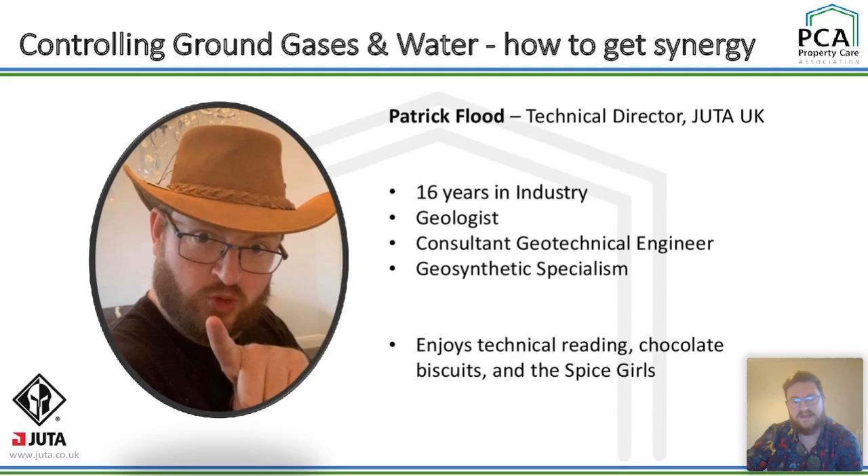And let's see if we can learn a little bit more about gas and waterproofing. I think there's a lot to cover. There is a hell of a lot. And what we're going to try and do is, I guess, scratch the surface in terms of some basic considerations. There's no way we're going to cover everything. Absolutely no way. I was saying to Andy and James yesterday, when they culled 30 slides out of this presentation because they didn't think we'd have enough time, which I agree with, there's perhaps going to be additional webinars required, focusing in on some of the more controversial or less understood aspects.

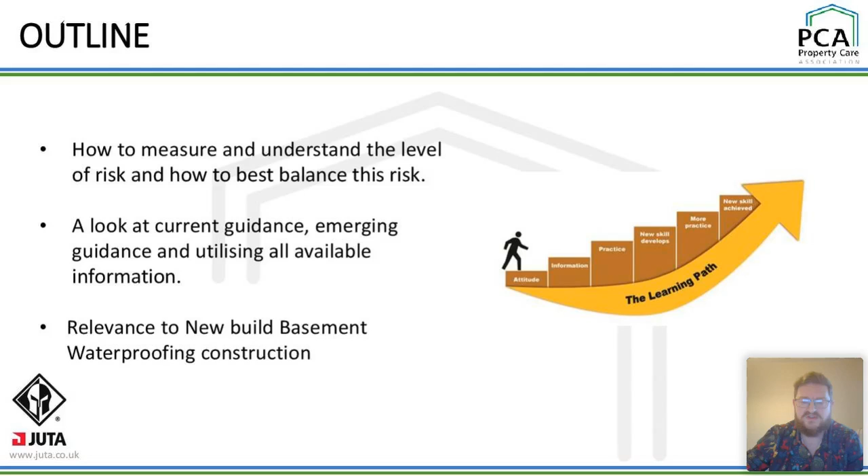But obviously the idea today is to look at how to measure, understand and balance the risk associated with structural waterproofing and ground gas protection. We're going to look at current guidance and some emerging guidance of relevance as well, primarily to new builds. So we're going to touch slightly on retrospective, but the bulk of this guidance and approach to particularly gas protection is focused around new build construction.

So hopefully today helps the listeners and the members of the PCA to be able to ask the right questions. What we're not trying to do here is to give you in a 45-minute session all the answers. The idea is to raise awareness of things we should be looking at and arm you with the right questions to ask, so how to get that information more than anything. We're going to focus primarily on the core principles of BS 8102 and BS 8485, which are probably the two most relevant guidance documents in this sector.

And there's a slight nod or tip of the old Akubra to the Basement Information Centre, TBIC, which is just about to publish, due in January 2021, a guide to basements and ground gas and structural waterproofing. We had a comments review meeting on Monday this week, so there was a lot of feedback from industry, for which we're very appreciative. There is still a little bit of work to do on that, but we're still confident of getting that out in January.

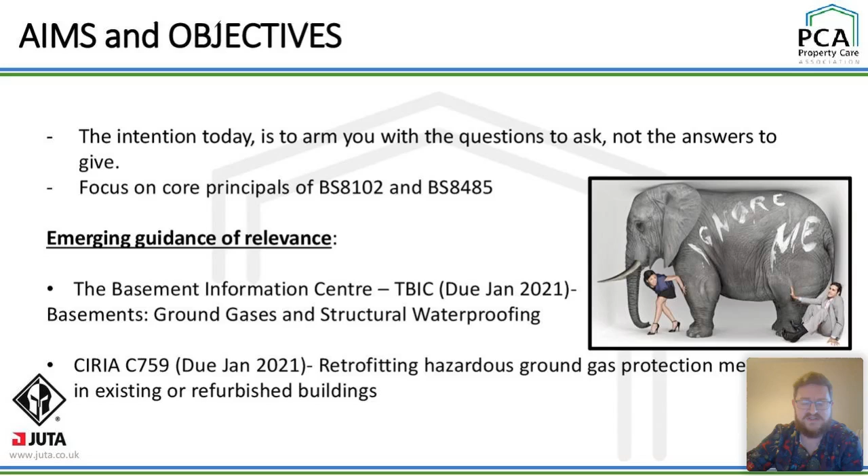And then CIRIA is about to publish as well, CIRIA C759, which is guidance around retrospective hazardous gas protection. So obviously there's quite a few members who I imagine would be interested in that. And CIRIA themselves, as well as probably the PCA close to the time, will likely run a series of presentations focused around the retrospective aspect. So we're just going to touch on the Hackitt report, and those of you who've been watching the news, obviously the Grenfell Tower disaster, which is currently front and centre of a lot of the news programmes.

But on the back of the Hackitt report, on the back of Grenfell, Hackitt commissioned this review of industry, looking at safety practices. And it started to resonate. So it's like a ripple in a pond. It goes further out and out and out, and eventually it encompassed the entire construction sector and the built environment. And what was identified during this process was that there's some bad cultural issues in the construction industry related to this race to the bottom.

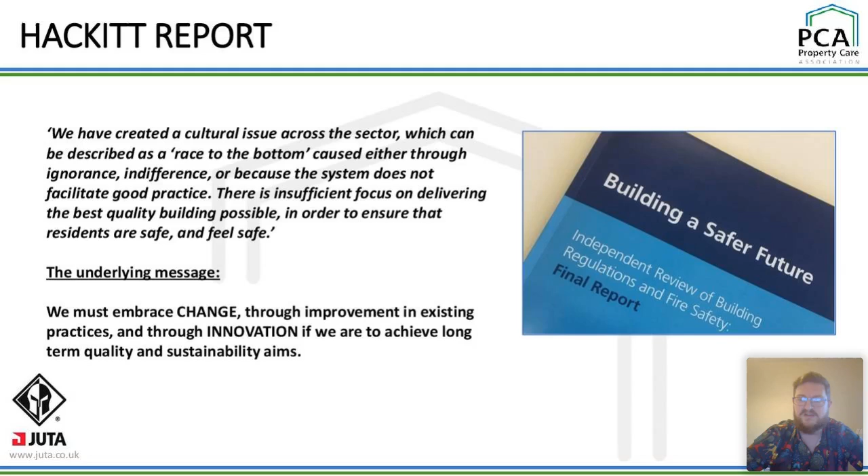So before we've even done anything on site, we're looking to save costs. And that doesn't really facilitate good practice. So what we need to do is focus on changing and embracing the change, both in terms of current practice and through innovation. So looking in more detail at products that are coming to market, looking to improve our sustainable approach and objectives if we are to achieve these long-term quality and sustainable aims.

And again, I feel a bit sorry for this chap at Celotex. If you've been watching the news, Celotex or Jonathan Roper, this chap has admitted to basically falsifying technical data sheets to fiddle test reports to make certain products look more suitable for application functions than they actually are. And I think, although the consequences of failure were obviously pretty significant in the cladding sector,

in the ground gas sector in particular, even with guidance changes in 2015 and 2019, we still see a lot of material supplied to market with good marketing information and statements of fact without any technical justifications or information to help engineers make an informed decision. And our job as manufacturers and suppliers is to give designers, engineers, architects, specifiers the relevant information to enable them to make the decision in terms of material suitability.

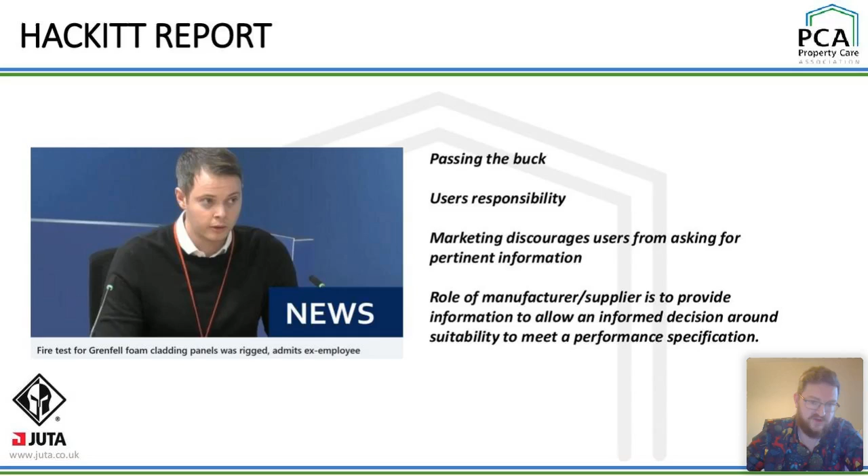So I think it's a fair point, and just helps us focus in on information, which is a theme that runs through today's session. So BS 8485 and BS 8102. The Code of Practice for designing protective measures for methane and carbon dioxide, gas protective measures for new buildings, and the Code of Practice for protection of below ground structures from water in the ground. I find it quite amusing.

Andy, if you stick the poll up now, I'll just carry on talking. So just a quick question for you all, just to see whether everyone's awake and alert at 9:07 in the morning. Which of these two documents do you feel takes precedent in this particular scenario? If we're looking at waterproofing and gas proofing, BS 8102 or 8485, which takes precedent?

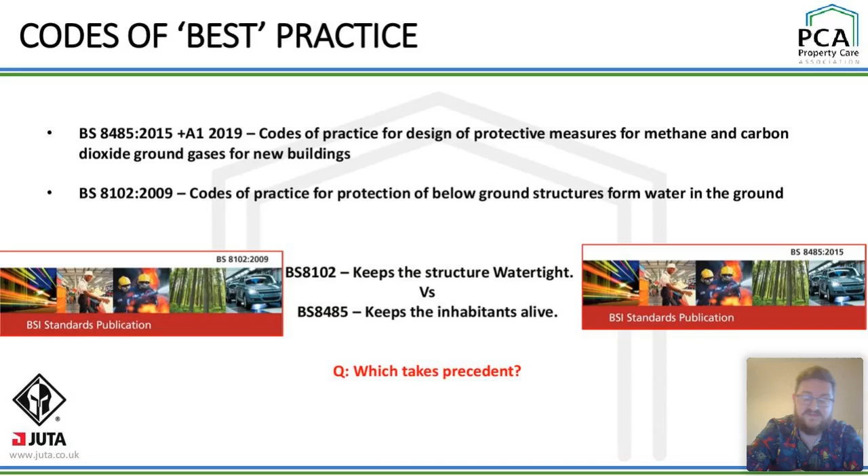And then most recently, which was only a couple of months ago, we have a housing development in Bradford which has been valued at zero because of failure to get appropriate sign-off on gas protective measures. And I know there are industry experts involved in a few of those cases still, doing back analysis, so looking retrospectively at gas protection. But both documents should be considered equal.

So if we look at our appetite for risk, there's a common misconception that basement construction is high risk. Of course, there are additional challenges with constructing below ground, but not all basement construction is high risk. So there will be some instances where we can construct below ground level with relatively low risk, both in terms of waterproofing protection and with regards to gas proofing.

But what we have in our industry is everything is last minute. The amount of phone calls I get, I've got three waiting for me when I come off this presentation, where we've got people on site and they're supposed to be installing gas membranes and they've got lift pits and they don't know what they're doing. It's like, well, how have you got to the point where spades are in the ground, concrete is being cast, and we haven't considered the forms of defence for the structure? It's bizarre, but it does happen, and it happens more often these days.

I don't know why. We often talk about in our office the last three to four years in particular. Everything is last minute. Everything is rushed. The amount of planning is out the window at the minute. Forecasting when people need materials, it's just very, very difficult to get a handle on programs of works at the minute, which is something I think we need to look at as an industry and look to change in general.

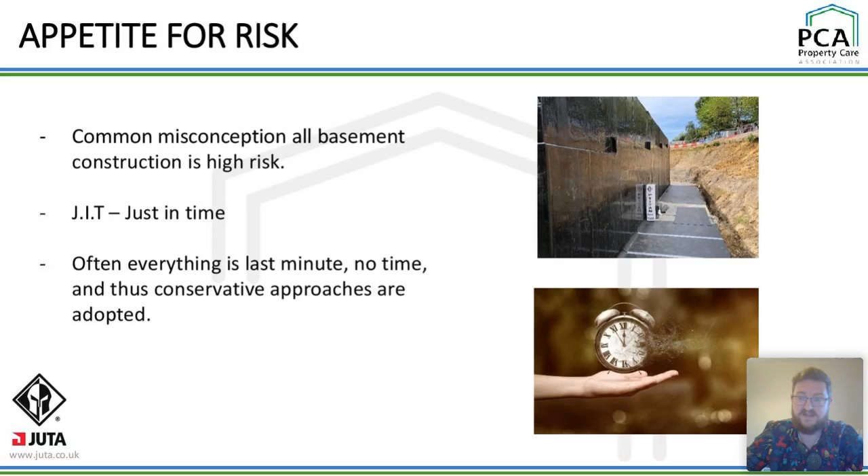So better planning will save ourselves a lot of pain and a lot of money by being better prepared. So that is what drives risk up a lot of the time as well. That rush. We end up having to compromise, and compromise is usually introducing additional risks. But to reduce risk, first we have to understand it.

And I know if any of my colleagues are watching this, they're going to be hanging their heads, because I'm constantly talking about this Dunning-Kruger effect in terms of the bathtub of knowledge. So when we do a little bit of training, everyone leaves the sessions feeling full of confidence, and they go out into the world preaching the message as though they know everything.

And then over time, you realise perhaps what I learned in that 45-minute session wasn't everything, and we develop an understanding over time. And then only with lots of knowledge and experience, both practical and theoretical, do we get a good understanding of industry, but we also learn to appreciate our limitations, which is part of that experience and knowledge curve. So we know what we're good at and we know what we're not good at.

And again, one thing I find hilarious about our industry, both in terms of manufacturing and environmental protection across multiple sectors, is we don't talk about our limitations. It's one of the things we don't do. I got embroiled in a LinkedIn back-and-forth a couple of months back, if anyone's that bothered about social media, where we were actively discussing limitations of products, and I think a lot of other manufacturers around the world were horrified that I'd gone on there and talked about what our products didn't do.

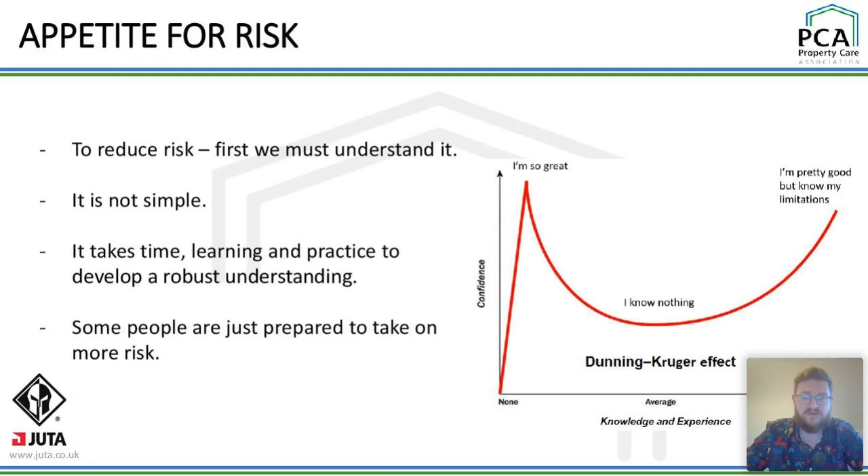We lost a little bit of transition feature actually when we uploaded the presentation to WebinarJam, which I'm upset about, but this particular slide, I mean, I see it all the time, again, with our guys, with others in the industry. We'll get a drawing in.

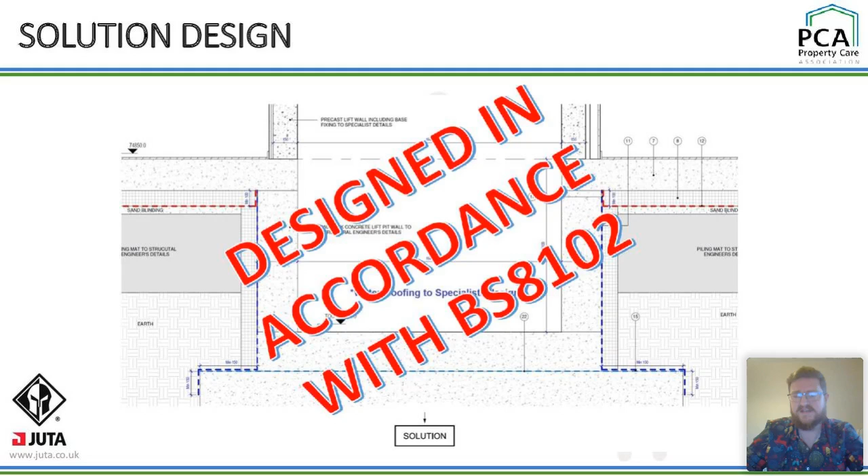There'll be some lines on the drawing which indicate damp proofing, waterproofing, perhaps a note saying waterproof concrete, but there's usually a big stamp somewhere on the detail which says waterproofing to specialist details. So line on a drawing by architect engineer, waterproofing to specialist details, and we instantly jump to solution provision, which is saying use X product here, X product there, this particular additive, and that is in accordance with BS 8102, provides a grade 3 environment. So that is designing without understanding the appropriate risks.

We see the same in BS 8485 with the point score system. We'll see details come into our office which say we have a CS2 residential housing development type A, 3.5 points required, and we go ventilated subfloor void, 150 mil minimum, 2.5 points, gas protective membrane, 2 points, 4.5 points, CS2 type A, tick, move on. That is not design. So adding up point score for particular elements is not design. You are basically ignoring the risk assessment.

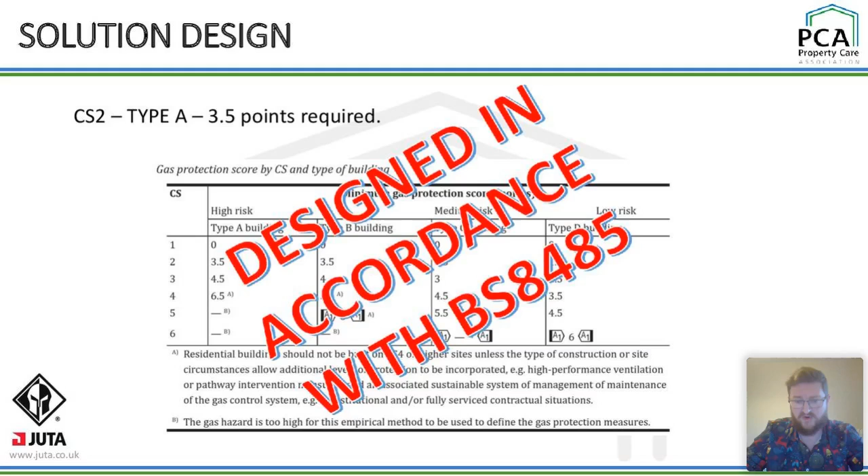So again, what we're going to do is focus on what we would expect to see to be able to justify those solutions that we propose from a supplier, manufacturer, contracting point of view, as well as from the regulatory perspective, so building control, architects, engineers, in terms of what information is required to provide that performance specification. Again, I'm going to try my best to cover it all, yeah?

So we look at design flowcharts. On the left-hand side, there is the design flowchart from BS 8102. On the right-hand side is the design flowchart from BS 8485. And in the middle is the combined flowchart from the TBIC document. And again, you're not supposed to be able to see that slide. They were designed to transition in individually, but the process of forming the design team, site investigation, desk study, risk assessment is consistent through all three approaches. So we should be doing that anyway.

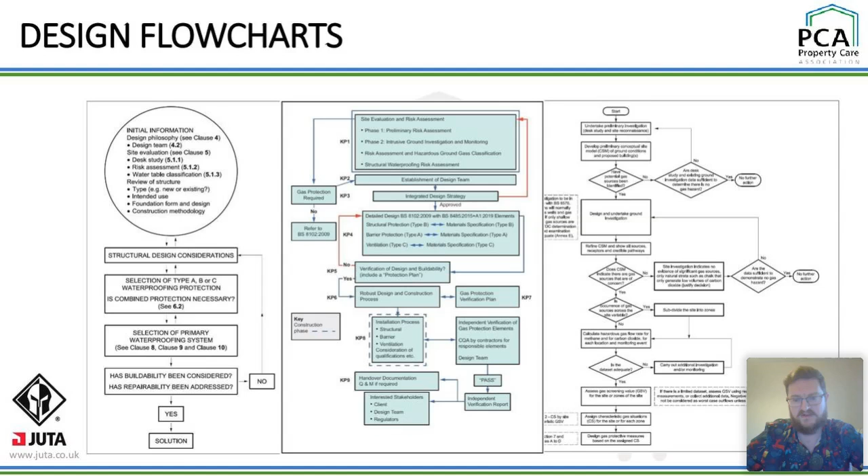So we're going to remind ourselves of this process, which I think is important because we have definitely, in general, I know my mate, well, there's a few mates, in fact, I shouldn't mention them individually, and I've not checked the chat, but I can probably bet my house that there's 2 or 3 people who are already chirping saying we do that. Like, don't worry, we sort that out.

BS 8102. So dealing with that combined gas and waterproofing system, I would argue it's already in there. So the design philosophy, section 4.1, details that appropriate structural waterproofing design should account for things like contamination, radon protection, methane, carbon dioxide, and other contaminants in the ground. The risk assessment process is already detailed out. Then we have an options appraisal phase already in BS 8102 before we get to the solution phase.

So the process of investigate the site, look at the risk, appraise the options, provide a solution is consistent throughout all this document. So that is the journey we are now about to embark on.

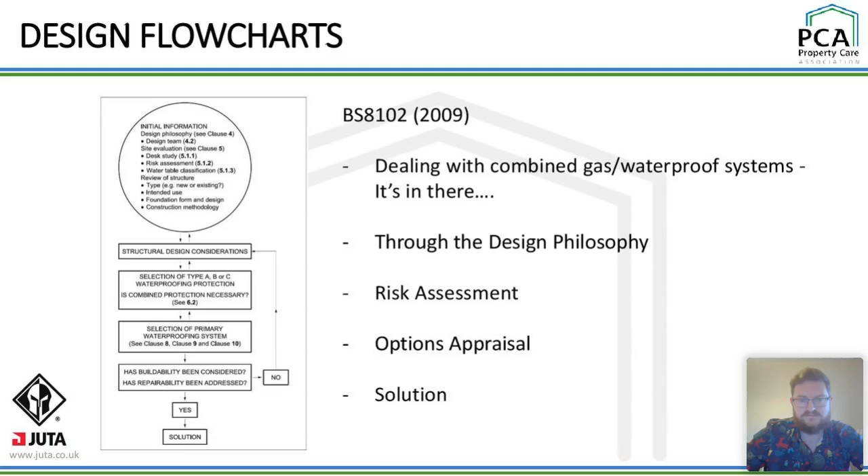So good risk assessment helps distinguish the high-risk sites from the low-risk sites. It's very difficult to say a site is low risk unless you've completed an element of site investigation, desk study, or risk assessment. So external factors may need control, things we can't do immediately in the vicinity of the structure. We may have to do some off-site measures to reduce the risk, and some developments may be completely unviable.

Although we ended up winning an award for it, there was the Harper Road project at Coventry recently, which needed an off-site dewatering, contamination curtain wall to make the student flats viable. So that off-site process was an integral part of enabling that development to occur.

There's another poll here, if Andy can start to prepare himself. I've chucked this in here because, again, it came up in discussion the other day. If we're looking at this sort of risk assessment design process, who would normally complete that, do we think? So in our opinion, who is assessing this risk? Is it a waterproofing specialist or would it be a waterproofing designer?

Well, folks, the poll's now up for everyone. Again, similar process. Just leave it up for a couple of secs. Again, don't let it run for too long. Just once the bulk of opinion starts to come through, just shout that out, Andy. But we debated this point the other day on Skype with some of my esteemed colleagues in the industry for 1 hour and 20 minutes. So let's take 10 seconds to see what the room quickly thinks.

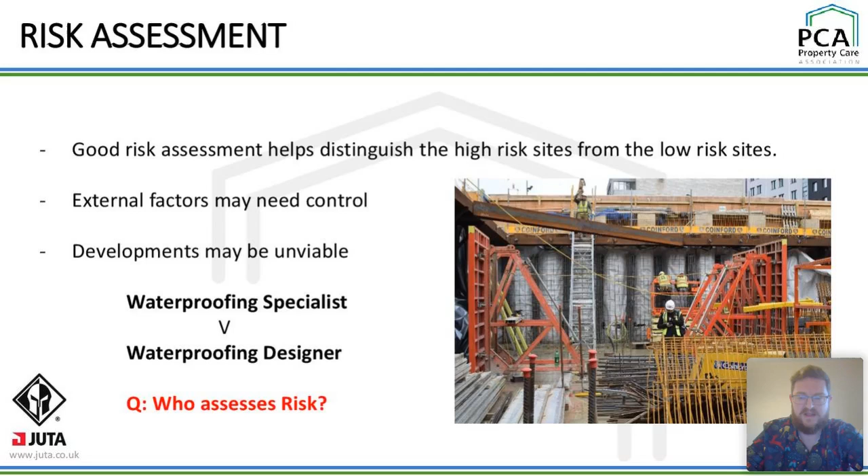So the risk assessment process, I've stolen this from Neil Salvage, who stole it from Ground Gas Solutions, GGS. The pie chart of investigation, risk assessment, design, installation, the gap at the end is the check. So check, verification, did it work? But approximately 60% of the pie is upfront work, so investigate, risk assess, design. So a big chunk of the inception through to development and construction is planning. Now, we talked about JIT, just in time. If we reduce that 60% to 2%, 1%, then of course we're asking for trouble.

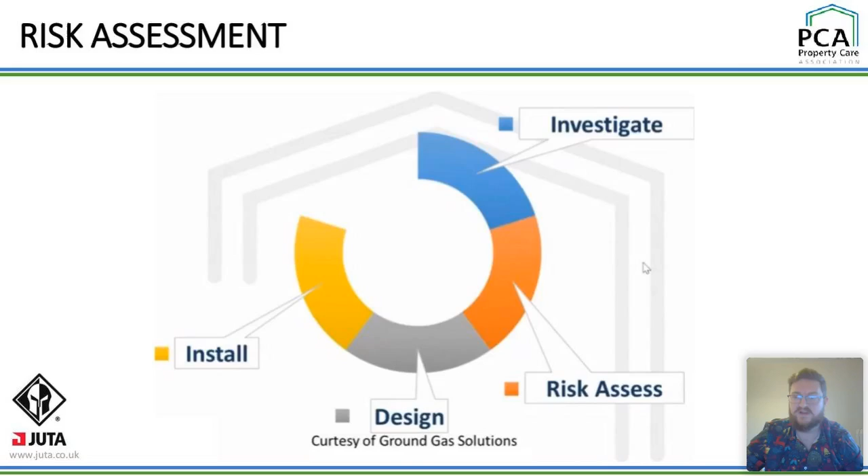So again, another poll, and then I'm going to leave you alone for a little bit. Has anyone ever completed or reviewed a conceptual site model? Often abbreviated to the acronym CSM, conceptual site model, or a ground model, which is the BS 5930 terminology. So have you run that poll, Andy?

And I think what I'm trying to instigate with our own team is getting in the habit of just whipping out a piece of paper and sketching up the site and where potential risk factors may be coming from in terms of developing those basic ground models. It helps us understand it. But how many people have reviewed or completed, Andy?

Well, there still seems to be one clear winner, the answer being no bloody chance, lad. No bloody chance, lad. I accept that, because conceptual site model is something we become very familiar with as a geologist. Obviously, I was sort of weaned off university on ground models, so it's second nature for me. But it's not for everyone else.

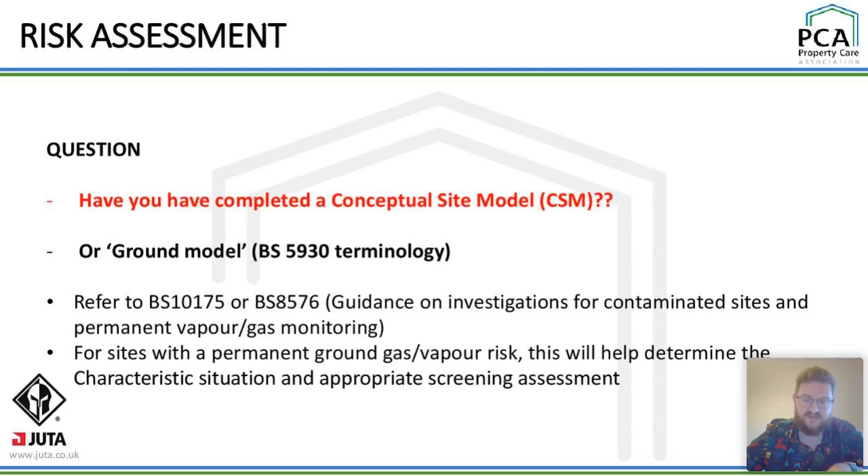But a visual representation of the site and the risks: what is the source of potential contamination or the hazards, so water, gas, contamination? How is it getting to the structure, so pathway? And then the receptor is obviously humans, animals, vegetation. So that source, pathway, receptor model, we can visually represent with a conceptual site model.

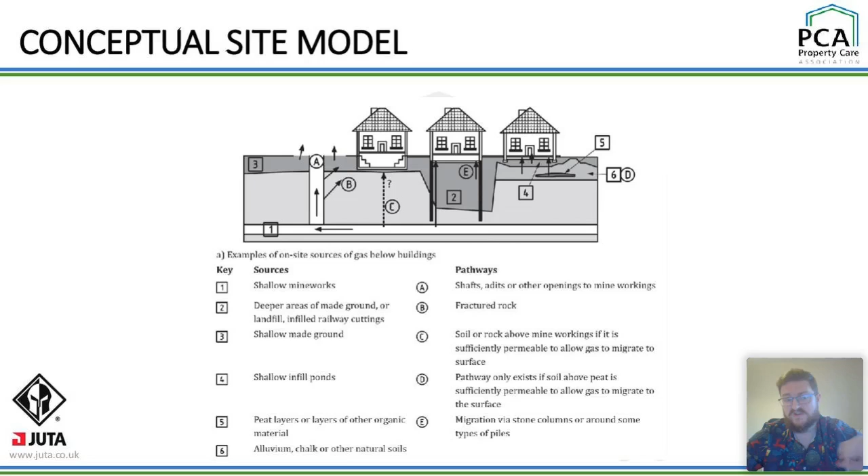So here's an example of a conceptual site model straight out of BS 8485. So if we look at houses with semi-basements or full basements, we're looking at where potential contamination or hazard is coming from, and how it is getting to the development. And once we begin to understand that, we can then look at ways of eliminating or reducing the risk. So building up that visual representation is an important step in the process.

And I stole this from EPG. Actually, I got permission to do so, but EPG represents it very well when it comes to assessing structures below ground. The type of risk assessment is dependent a lot on the groundwater table. So whether we have a high water table, so water directly in contact with the basement, the type of assessment is different. That would primarily be a dissolved phase assessment. So the water has the gas in solution, and if the water is entering the structure, it's taking the gas into the structure.

On the right-hand side, where you have a capillary zone or an unsaturated zone below the structure with a low water table, or a water table which is variable, which has a pumping effect on ground gas, then the risk driver is gas. So gas will be forcing its way or looking to enter the structure in gaseous phase. So the two ways of assessing the risk are different depending on the groundwater table. So for very deep basement structures, which would be anticipated to be completely submerged most of the time, a gas phase risk assessment is not the most appropriate way of assessing the gas risk on that structure.

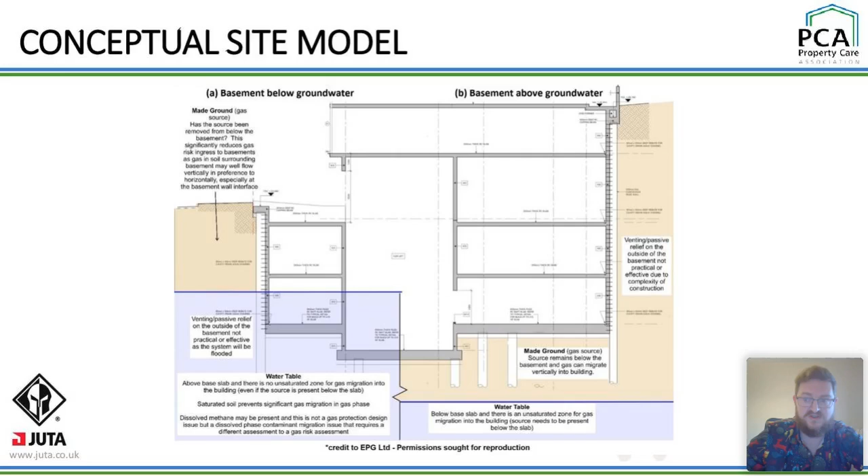It's a more detailed dissolved phase assessment. Okay. Now, again, that in itself is probably a 3-day training course. So we'll very briefly touch on it, but it's the different ways to look at the risks and justify solutions ultimately. Yeah. So a desk study, so a good desk study is about technical due diligence.

So we start at like a high level, so a helicopter view. So we're up in our choppers and we're looking at the site. And we're saying, what can we see around the site? Like, what's that over there? That looks like an old landfill site, or there's what looks like an abandoned factory over there. So there's a potential for some off-site source contamination over there.

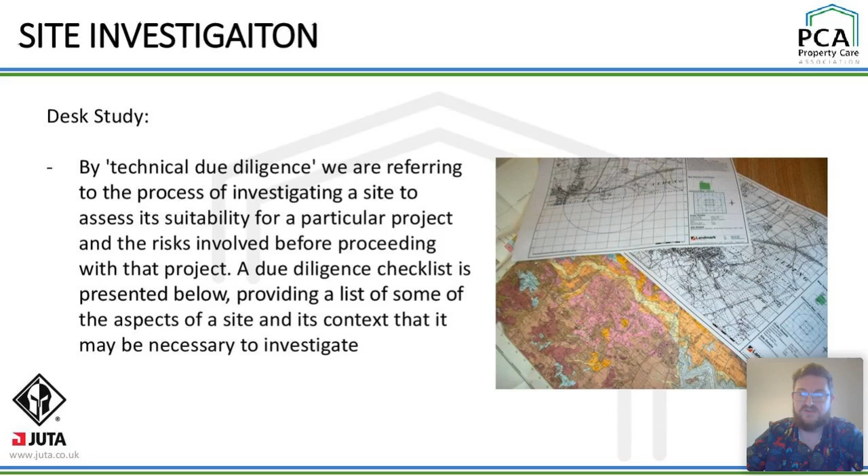So we complete that high-level check first, and that will then determine whether we feel there is justification for doing any more investigative work, or whether we feel the desk study has provided enough information for us to justify the site is reasonably low risk and proceed as such. So the desk study may kick out the fact that we need a ground investigation. So we may need to dig some boreholes or trial pits, or what's called a phase 2 or a phase 2A, which is perhaps some bespoke gas monitoring or vapor assessments.

And then usually on the back of an investigative report, there's a level of interpretation that occurs, so what's called a phase 3, where we investigate and we report, and then we interpret that. What does it mean? So what are the consequences of that? Additional remediation may be required to reduce the level of contamination to an acceptable measure, i.e. the incorporation of gas protective measures or the removal of on-site contamination by excavation. So we need to dig that source of contamination out, move it off-site, before we can proceed with the development.

If we leave it in the ground, then we're going to have some very expensive and costly protective measures to implement. And then phase 4, which is validation or verification as we commonly know it. That's part of a phase 4.

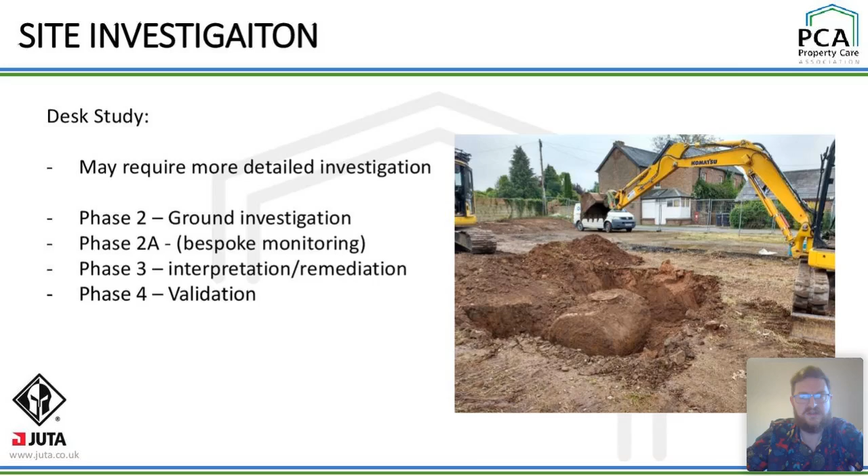Recognized gas screening approaches. I'm going to just start to speed up a little bit. I'm nearly half past. So we have low risk sites which can work on total organic carbon content, TOC assessment, so made ground assessment, what we call semi-quantitative approach or empirical, which is the gas screening values or the CS scores and the matrix from BS 8485, and then what's referred to as DQRA, so detailed quantitative risk assessment.

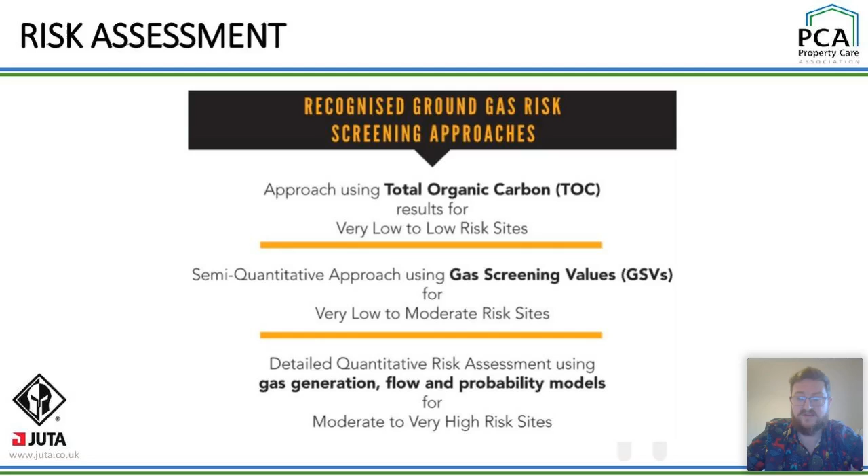Now, a DQRA is usually required when the risks are either too high to model empirically, so when it comes to basement structure, it may be the points score model doesn't fit, given the risk. So we need to do a more detailed assessment, or we can use it to lower the risk or characterize the site in more detail. So we investigate the potential over time of the source. So any source of contaminant has to have the potential to remain over time to present a threat or a risk to human health. Yeah. So a DQRA will look at that in more detail.

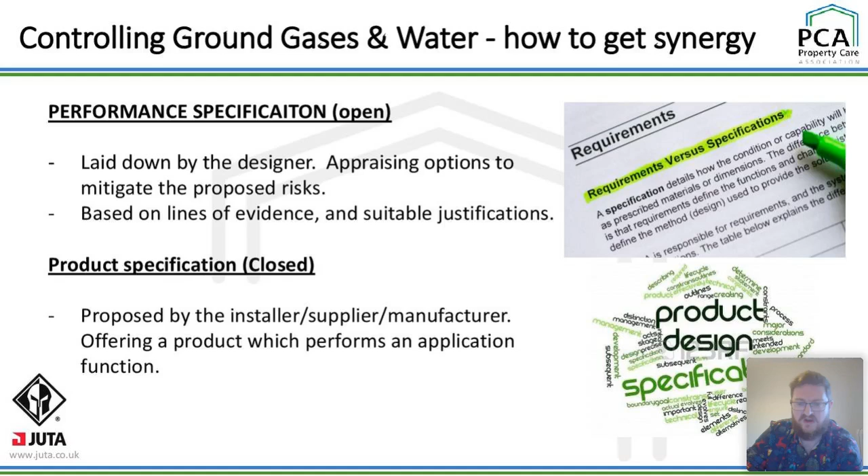So then performance specifications, which are generally referred to as open. Open specifications, usually laid down by the designer, appraising options to mitigate proposed risks based on lines of evidence with suitable justifications. Or we have product specifications, which are also called closed specifications, where the designer may specify particular products through justification, or it's a proposal by installer, contractor, manufacturer offering products which perform application functions.

So when we look at gas protection above ground, we have three elements to work with. So the structure itself, which can be various forms and has a sliding scale of points, but that sliding scale represents the relative impermeability to gas of the structure. So the more compact, dense, reinforced concrete will have a higher gas protection score versus open block and beam flooring, which is relatively leaky and therefore has no protective score. Gas membrane, so a 0 or 2 point score.

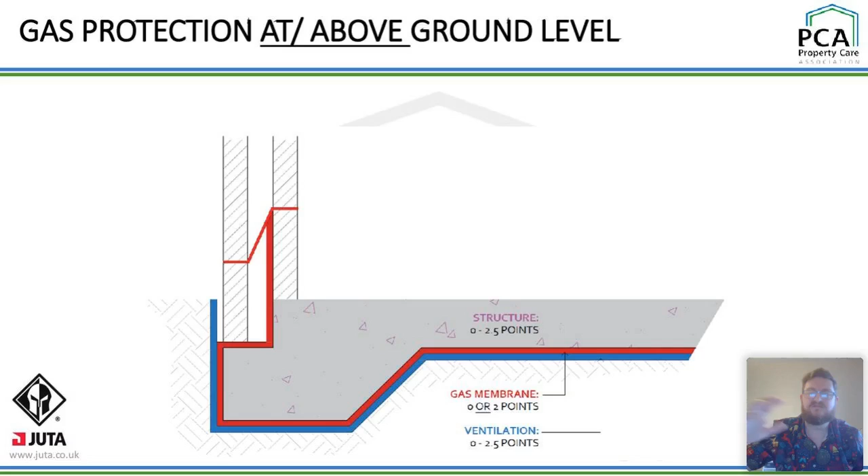External ventilation, again a sliding score based on the amount of air and the ability of the open void below the structure to dilute hazardous ground gas to an acceptable concentration. When it comes to basement construction, we generally discount external ventilation in respect of BS 8485 because we can't guarantee that the external ventilation is going to remain functionally intact, i.e. the void remains open below the structure for the anticipated design service life, which is probably going to be at least 60 years, because the below ground structure, or that void below the below ground structure, can flood.

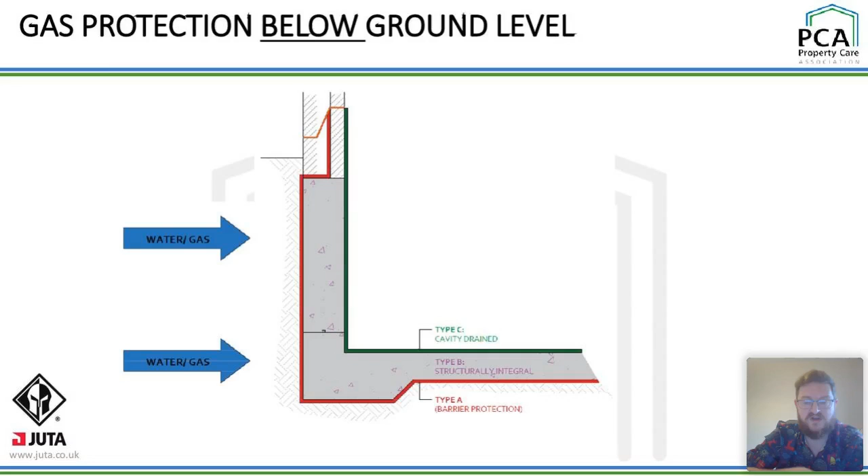Yeah, and if it fills with water, then it's not allowing air to move through it. So we can't rely on those systems for below ground waterproofing and gas protection. So when it comes to BS 8102 and below ground structures, we're left with the type A protection, so externally or potentially internally applied in cases, barrier, the structure itself again, which is very, very important, and then an internal cavity drainage membrane.

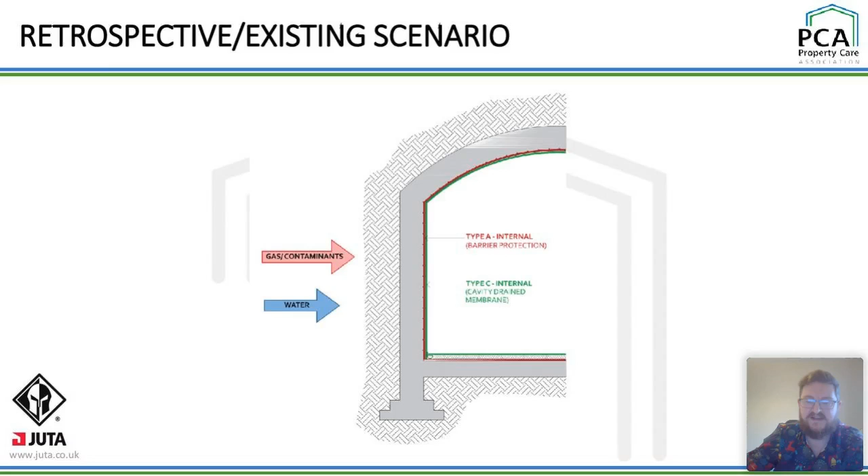So we're looking at risk coming from the outside of the structure, working its way in towards the receptor. Just very quickly touching on retrospective basements, we don't have the ability to look at the outside, so we're often forced to deal with the inside. So again, this new CIRIA document that's coming out will deal with this in much more detail, but your option appraisal is significantly reduced when you're looking at existing structures because you can't access all areas of construction.

As we touched on before, you may have come across this in risk assessment, so ERIC, or ERIC PD it actually is. The PD is protective equipment and discipline. But if we focus on the core principle: eliminate, reduce, isolate, control. So the first thing we look to do with any sort of risk assessment is to eliminate and reduce the risk before we have to isolate and control it in contact with the receptor.

So another poll for Andy to throw up. Just a question. I'll be surprised if anyone gets this one wrong, although there is no wrong answer, or is there? Where is the best place in new build construction to address risk?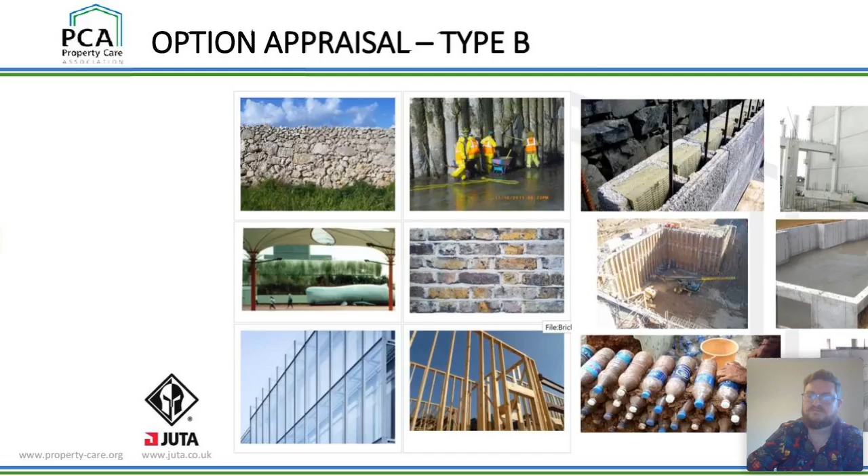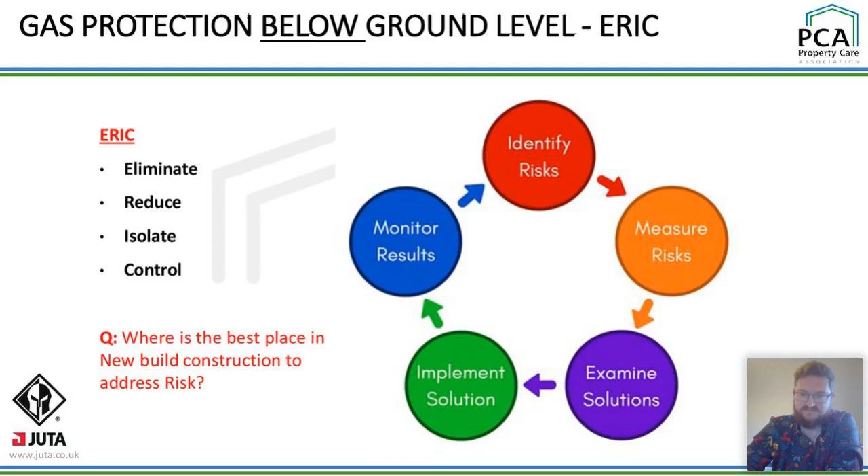Yeah. Well, folks, that poll is now up for everyone. It should again just pop up on your screen. I'm just waiting for results just coming through at the moment. Patrick, I can tell you there's one clear winner at the moment. Inside? Well, wait, what? There's one clear winner at the moment, but people are still pressing the button, so I'm not going to announce that answer just yet. So we'll give it another 3 or 4 seconds, guys, because we need to kind of move on. So 3, 2, 1. We're moving. There we go.

Right, okay, clear winner being number one, outside, before it comes into the structure. Outside, yeah. So, I mean, I think it's an obvious one. We should be looking to keep the risk out of the structure as best we can. And only if it's impossible to do that should we start to implement isolation and control measures in close proximity to the receptor. So we're going to move through onto options appraisals now.

So we look at the structure first. Probably the most important aspect of any construction is what it's going to be built out of. This is doing all the structural work. It's keeping the building up. It's keeping it intact, integral. So the structural aspect is the primary form of defence.

Andy's messaging me, speed up.

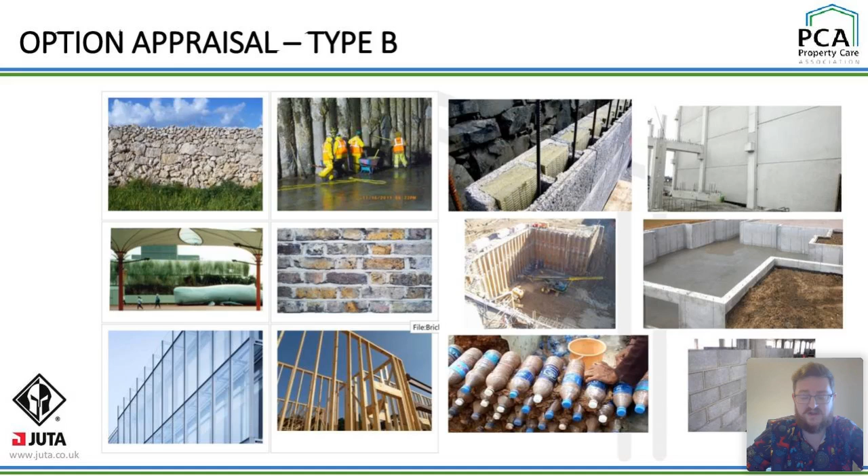So you can build a structure out of anything. I put the plastic bottles one on there because I think it's amazing some of the things they do in developing countries, where we're looking at different methods of construction to keep people safe and dry. But it's just completely inappropriate for below ground structures.

When we look at BS 8485, I know there's a lot of people upset about this or can't quite understand it, and I am one of them: why they decided to differentiate the point score between grade 2 and grade 3 waterproofing. I don't know many structural engineers that design the concrete to leak, which is essentially what designing to grade 2 would be. We're usually looking at making the structure as watertight as possible.

And therefore I think we should all accept a good, well QA'd, so quality assured, compacted concrete pour with controlled crack width is deemed sufficiently impervious to water and gas. So a well compacted concrete structure has a very, very low risk score when it comes to gas and water permeation, and therefore it has a high point score in terms of its point scoring index, so 2.5 points.

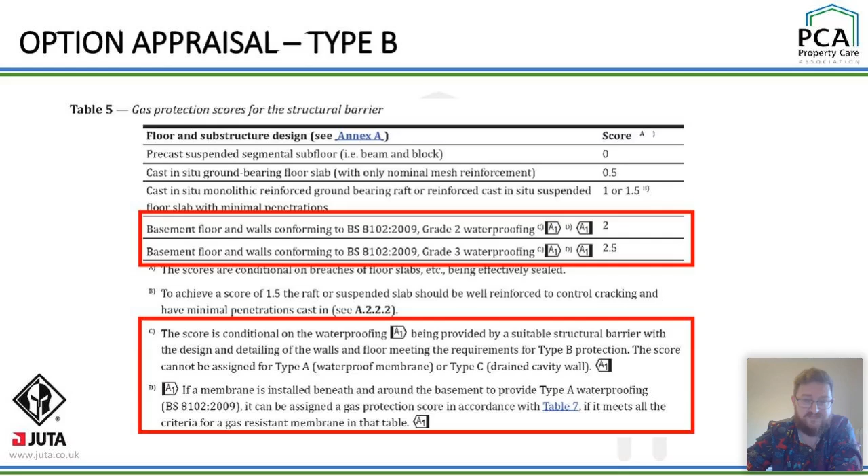What was clarified in 2019, because of the grading environment, which causes confusion as well sometimes, was that score is for the structure on its own. It's not dependent on the actual grade environment. So what we're actually looking to do is to remove that ambiguity. I don't think many people would be looking to use 2 points.

Because 8485 further goes on, when we look at Appendix A6, A2, it actually classifies concrete to grade 2 or 3 to BS 8102, which is essentially BS EN 1992 Part 3, as low risk. Yeah.

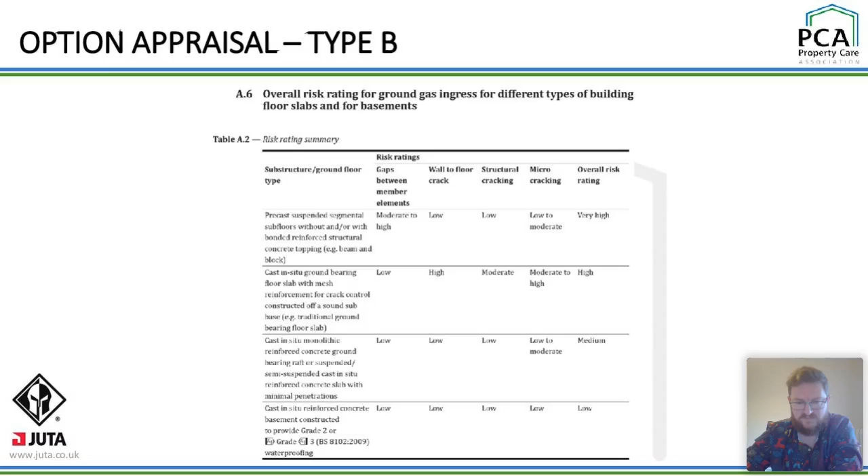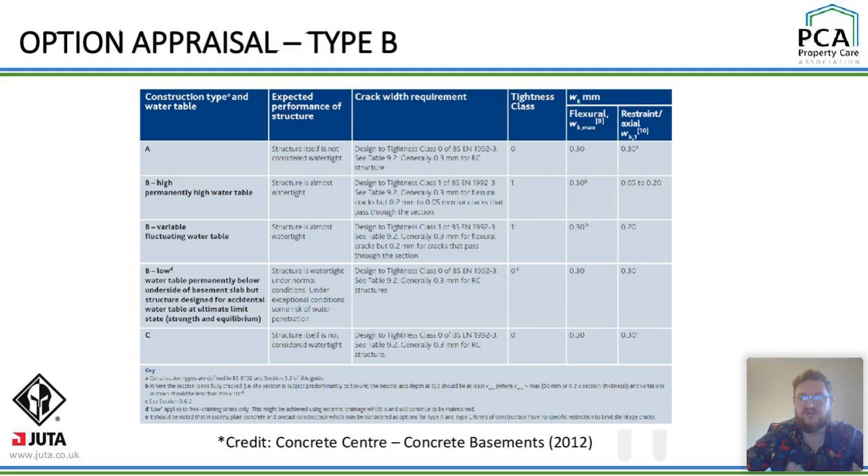And then I stole this from the Concrete Centre as well. So we look at tightness class of concrete structures with regards to the water table. So if we start to look towards tightness classifications rather than grading environments with regards to gas protection, this may assist the process of understanding that well compacted, QA'd concrete is a good form of defence for water and gas

protection. NHBC guidance goes as far as to stipulate crack widths. So what NHBC would deem as watertight: concrete with admixtures is 0.2 for cracks all the way through and 0.3 for flexural, and without admixtures 0.2 for both full and flexural cracks.

The inclusion of an additive, an admixture, or a superplasticizer or crack inducer in injection, I don't want to exclude any potential solution here. That's not what it's about, because everything is on the table for consideration as long as appropriate justifications are in place. So if I've missed a particular technology you provide and you're in the chat and you're currently melting your keyboard, I apologise. I can amend the presentation retrospectively to include it if you feel appropriate.

But the inclusion of these performance enhancing products, let's use that, reduce pore space, seal cracks, promote healing and reduce capillary action of the concrete, which reduces the risk even further. So if we can improve the water tightness of the concrete, it will improve its resistance to gas transmission. So that is a risk reducer, the inclusion of a performance enhancing additive.

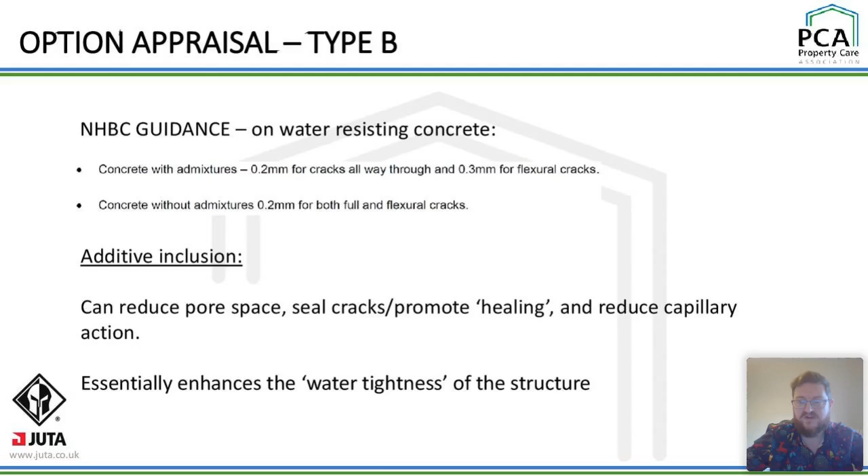But there is this argument that all concrete is porous. So notwithstanding it does crack, gas, and particularly radon, will permeate through the pores and also by diffusion across the pores. So radon in particular, being a radioactive element, through decay from radium's alpha particle down to radon, can move across that concrete structure fairly readily.

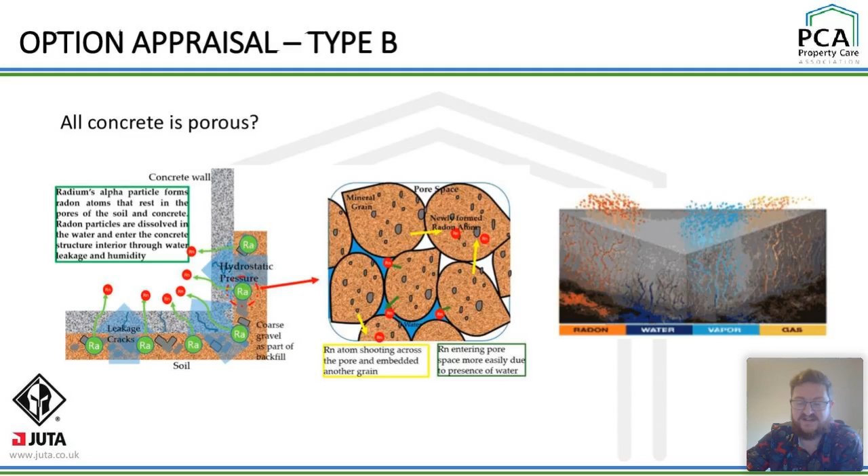So if we're dealing with radon affected sites, and I know again I'm deliberately trying not to touch on that because it is a subject in its own right, you should incorporate some sort of protection or ventilation system internally to control that. Type B systems, there are a whole raft of protective measures out there.

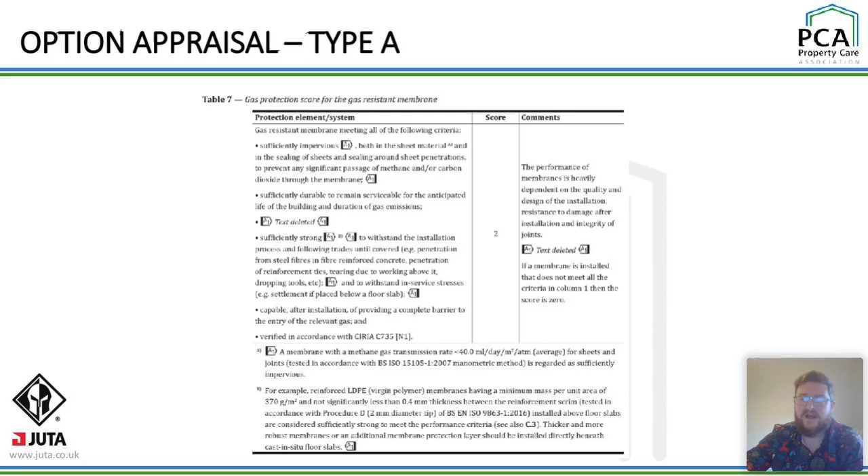8485 goes as far as this table 7, which again is the bane of most people's lives because everyone just focuses immediately on the benchmark performance value of less than 40 millilitres per metre squared per day per atmosphere, but there are other things to consider in there. Probably the most relevant part is the independent verification to C735.

8485 also confirms that there are many different types of gas membrane and membrane choices. So each type of membrane should be considered on its individual merits and conformance of properties. So the ability for it to resist puncture, elongate through anticipated structural movement, the gas transmission rate, its resistance to water pressure at various application depths are all things we should consider.

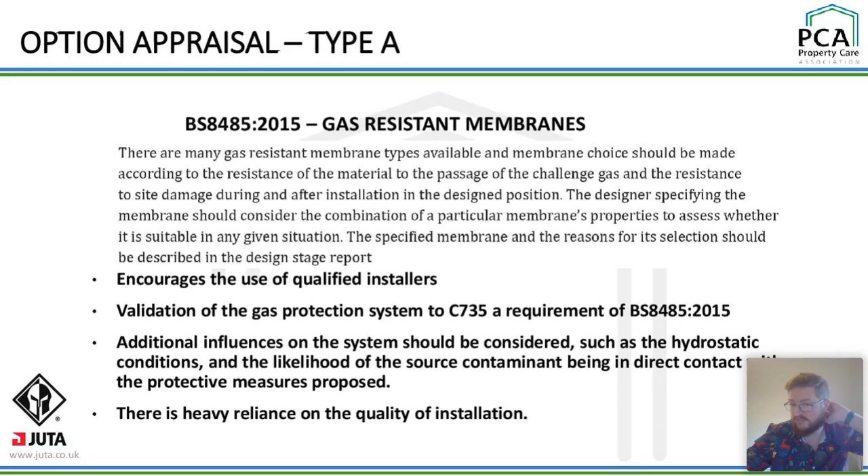And one of the things we do like about 8485 is it encourages the use of qualified installers, because as we know, no matter how good these systems are, if they're installed like a bag of spanners, they won't work. The same is true of concrete, type A membranes. If we just let unqualified, unskilled labour install these systems, we're asking for trouble in the future. So there's a focus on do it properly, have it independently checked, and that is the best way of reducing scope for defects or potential defects to occur at some point in the future.

Type A options in BS 8102 vary from loose laid bonded sheet membranes, liquid applied systems, GCLs, incorporating coated products as well, mastic asphalt, cementitious crystalline slurries and multi-coat renders. And what you tend to find is the GTR increases as the pore space is open. So your barrier systems or membrane systems generally have a lower gas transmission rate, and your cementitious type systems have a higher gas transmission rate.

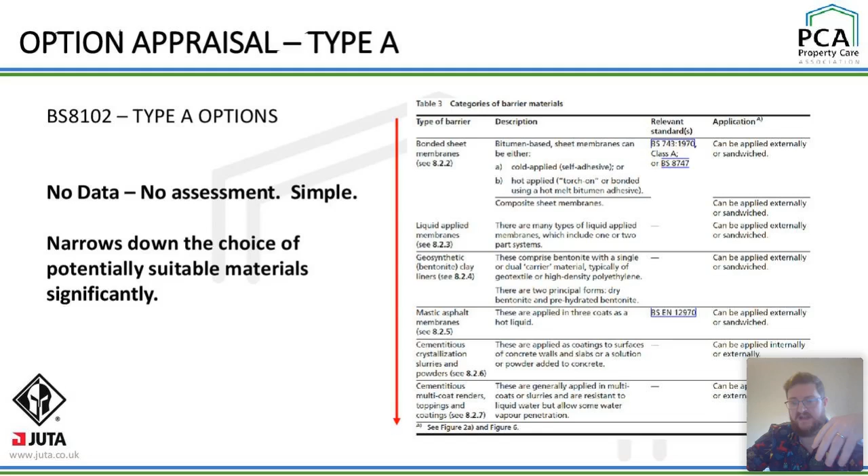Each of these systems can be justified as appropriate in any given risk scenario by the designer. It's not a pass or fail criteria. Everything has to be justified. It's easier to justify the inclusion of a material which has a low gas transmission rate than high, but everything should be considered.

C748, again, hydrocarbons and VOCs, you're dealing with fairly bespoke vapor intrusion assessment. So the information is important. So if you're going to consider these materials for use as VOC and hydrocarbon membranes, you would expect to see a set of information which is outlined in C748, and that is permeation rates for a suite of BTEX, TCE, so tetrachloroethane, trichloroethane, hexane, vinyl chloride. It's like what we call the challenge 9.

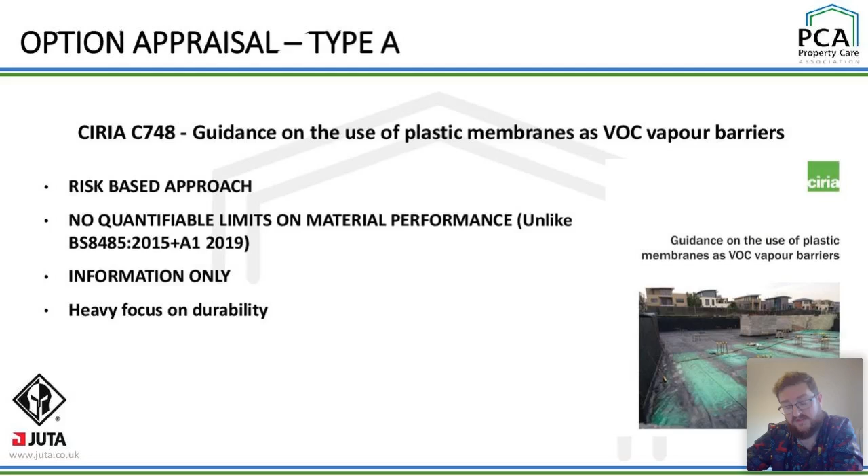So as well as durability information, because hydrocarbons in particular are fairly aggressive on structures and on thermoplastic materials or derivatives of. So it's additional assessment required for VOCs and hydrocarbons. Aluminium foils below ground, I'm just going to quickly touch on this. We're seeing quite a lot of this at the minute because we have above ground gas membranes, which are enhanced DPMs, so damp-proof membranes, usually incorporating a layer of aluminium, which has a very low transmission rate for gas.

And we think if we stick a gas-resistant damp-proof membrane onto the back of a typical waterproofing product, then we've got a waterproofing membrane and we have a gas-proofing damp-proof membrane. We stick the two together, but that's a recipe for disaster. So the aluminium will degrade over time. Aluminium is not designed to be installed in hydrostatic application conditions. It corrodes. On the negative side, it removes the bonding element, and on the positive side, it prevents the hydration of this active system. And I've just got enough time to squeeze it in.

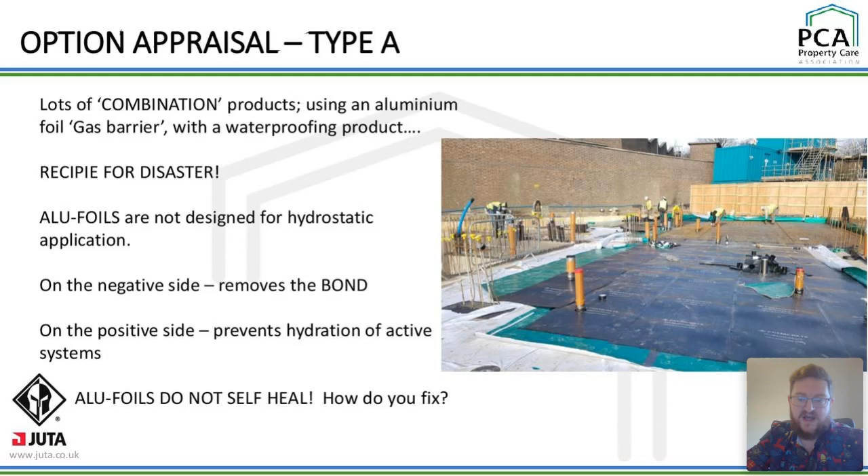So Terminator 2 technology doesn't exist. Aluminium doesn't self-heal, contrary to what some marketing literature would have you believe. So massive red flag for me, that.

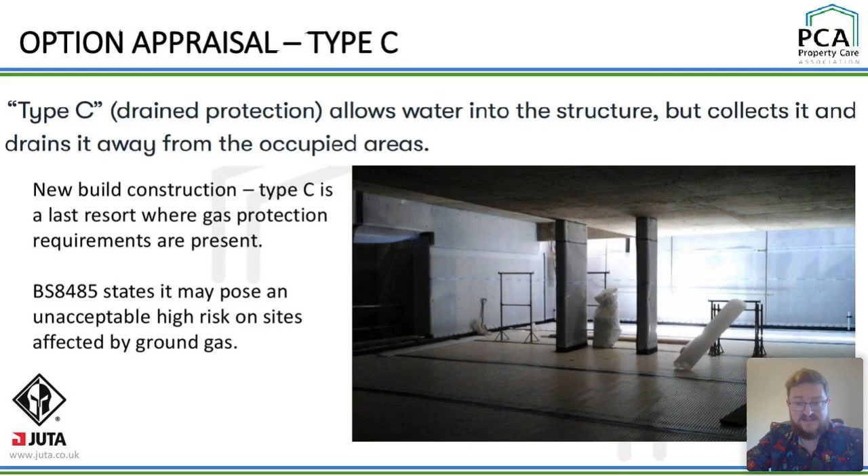Type Cs. So management systems allow, obviously, water into the structures. So for new build construction, Type C is, unfortunately, for probably a lot of the audience who are going to melt their keyboards at me in a minute, a last resort where gas protection is required. BS 8485 goes as far as saying Type C systems may pose an unacceptably high risk on sites affected by ground gas. But don't despair, because where ground gas is there, and we're looking at cavity drainage membranes or Type C systems, the ability of the CDM itself to restrict gas, so the GTR, is largely irrelevant.

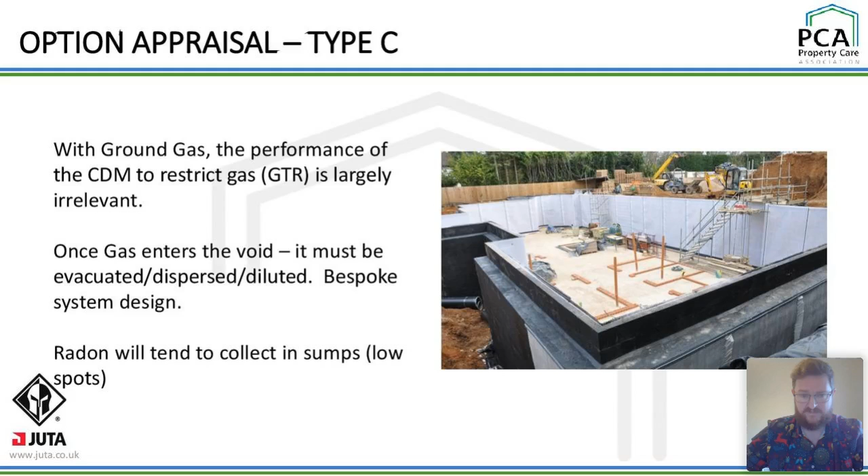So what is important is that we can ventilate that void. Once the gas is in that void, where does it go? So we can do designs or systems which will evacuate that void, either by the addition or removal of air. I need to be really careful with my wording, because there's probably two particular individuals sat there waiting to press buttons. And radon will collect at lowest points. So those sumps, we must be able to ventilate those sump areas.

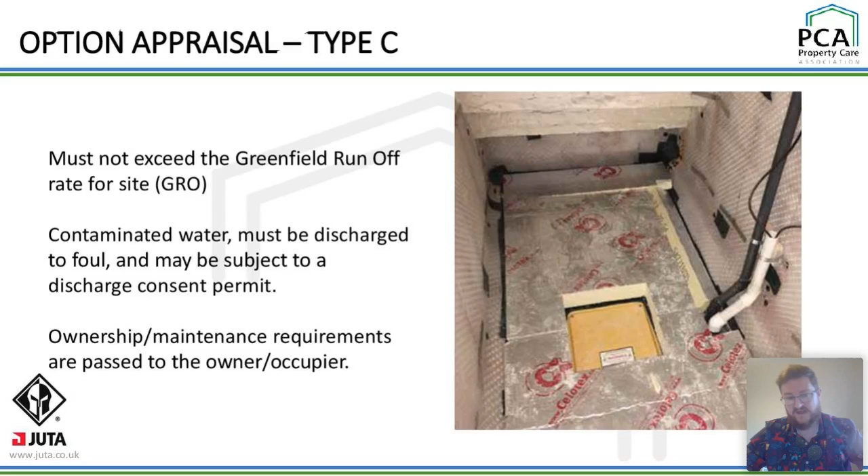Contaminated water, which is collected in a Type C system where there is contamination and ground gas on site, requires a special discharge consent. So we can't just chuck that into surface water. We need discharge consents or discharge permits, and then that information should form part of the O&M pack that is passed on to the owner occupier, who's responsible for the ongoing maintenance of those systems. So provided you do all that, then there is consideration for those systems, and hopefully you can all be happy again.

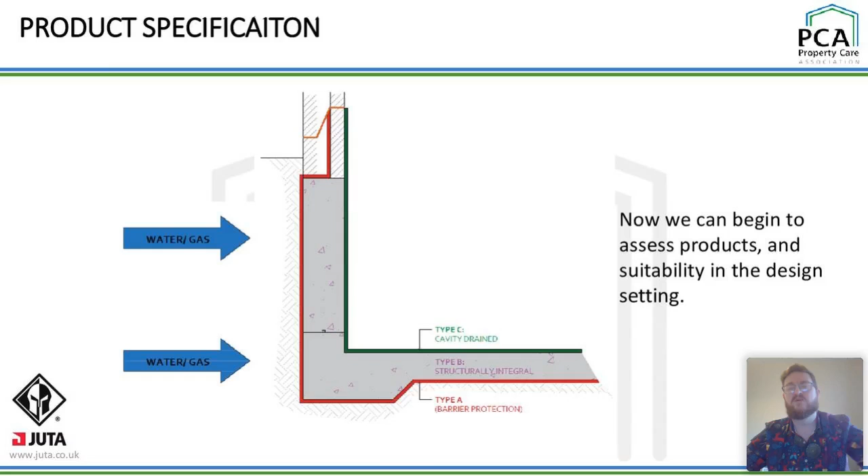Reducing risk with combined elements, and I'm going to speed up a little bit now, someone is kicking me under the table. But we're beginning now to look at assessing products and suitability in the design setting. So we've completed that risk assessment process. We're going through the design flow. That's all we're doing. We're assessing the risk. We're looking at the options. What is the most suitable option? And then that helps us define the scope of protective measures, including for elements of uncertainty, so factors of safety. There are factors of safety built in to these empirical models that form the point score.

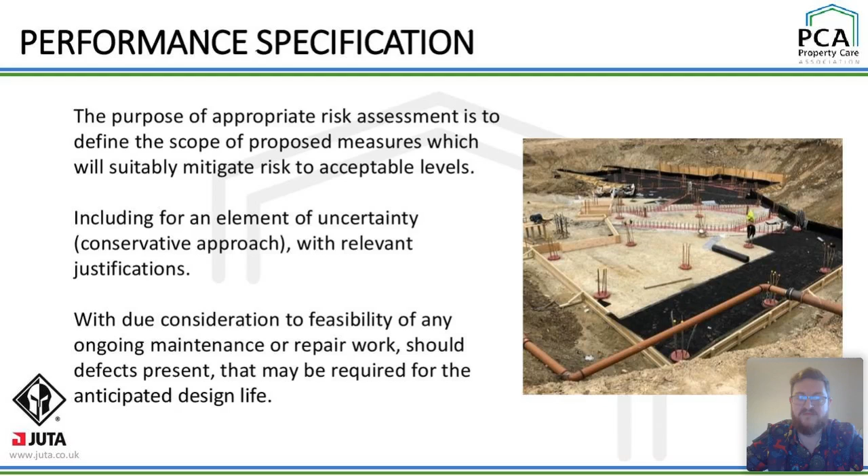So that's what DQRA will do as well. You basically start to look at reducing those partial factors. So your overall factor of safety may come down, which means that protective measures may be able to be justified for higher risk sites. And we've also got to give due consideration to feasibility of ongoing maintenance and repair work should defects present. That is a consideration in all designs, not just waterproofing.

So a typical specification that may come out would not, for me, state a product. And I know a lot of people are going to be like, well, you're crazy. And my own commercial team thinks I'm mental when I do this. But open specification. So if you are a specifier and you name a product, then I don't use this to scare you, but that's what happened at Grenfell.

So they specified a product which was hiding information. So you're almost better keeping it open and letting the market do the cost saving for you. They will compete to offer more competitive value engineered solutions to hit the performance specification. So you would get typical performance requirements for the Type A, Type B, or Type C system, and then it's up to us as suppliers, contractors, manufacturers to make the system fit the performance specification.

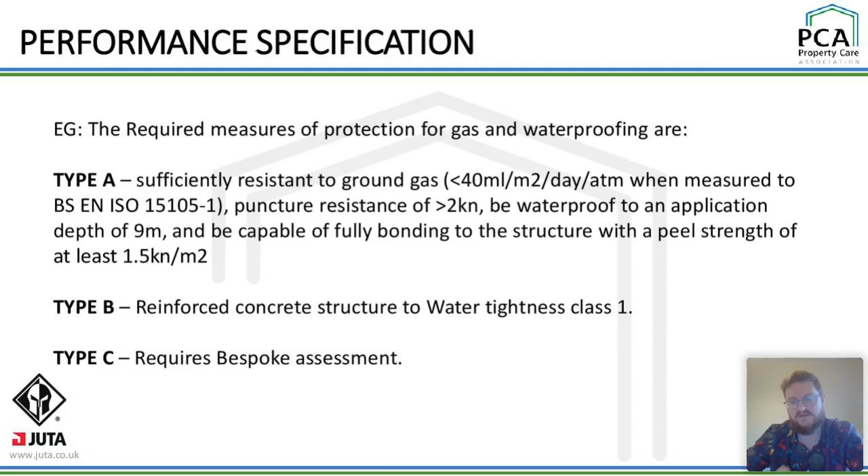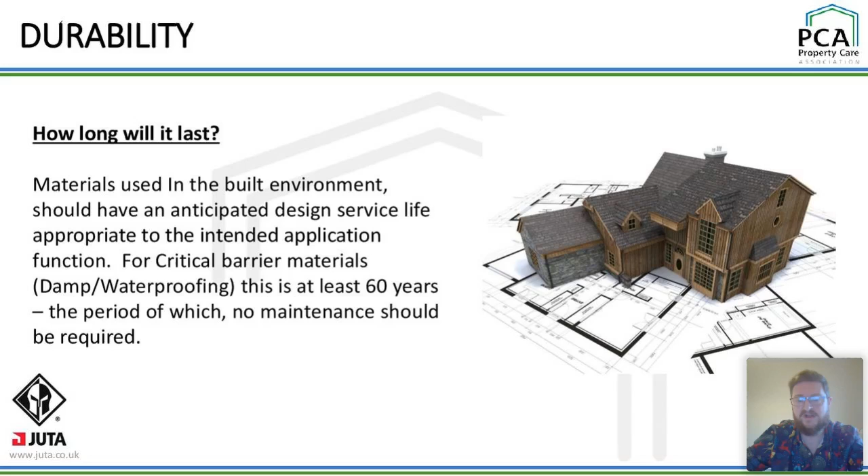Durability, we're coming towards the end here. Something we always miss, and again, we run separate CPDs on this element on its own. So materials that are used in the built environment have an anticipated design service life of at least 60 years where they're forming critical material functions. So things like damp proofing and waterproofing is deemed a critical barrier function, which means the anticipated design service life of the materials we use should be at least 60 years.

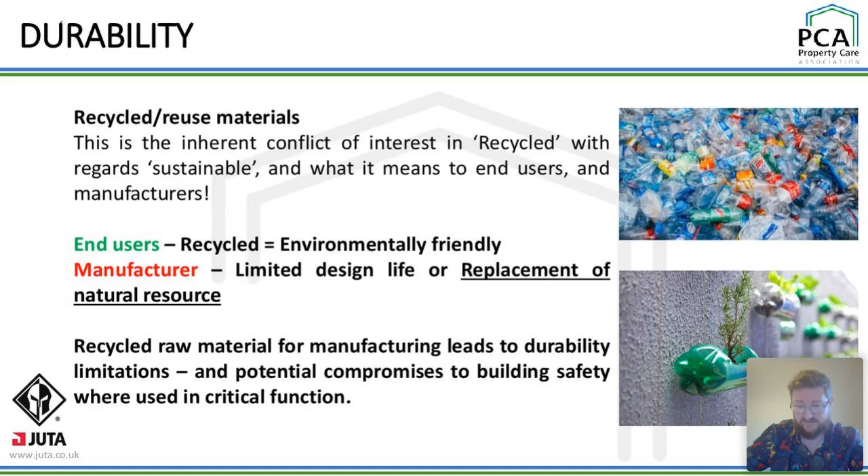So when we use the word sustainable, immediately the end user thinks you're using some sort of recycled raw material. And there's a conflict of interest here because raw material for critical performance barriers should be controlled, which means virgin to a specification. Where you introduce a recycled element, you vary the raw material, which compromises its performance over time, which could potentially compromise its application function in the built environment.

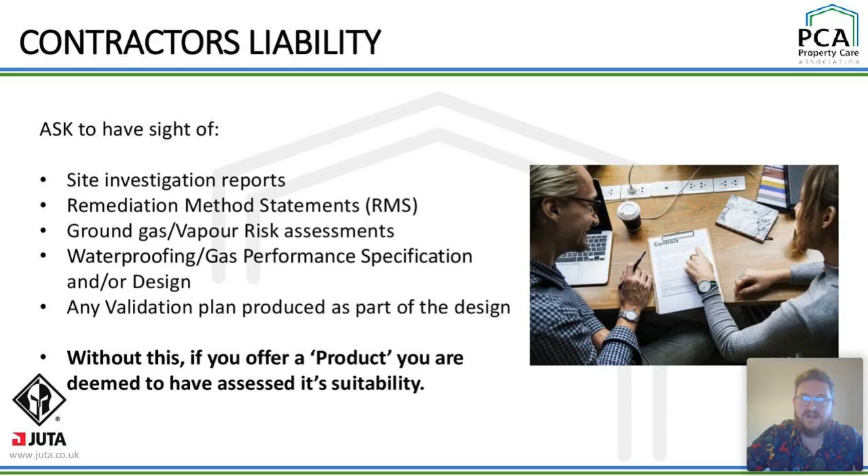And without that, anything you offer is deemed to have been assessed as suitable. So you open yourself up to quite a lot of liability if you don't review this information. And don't be afraid to put those limitations in your project submissions or design reports or technical assessments, whatever you want to call it. List the information sources, list what recommendations you're not covering because you don't have the relevant information, and provide the justifications for any proposals you do make, and try not to alter that performance specification, because that is where you start to adopt design responsibility.

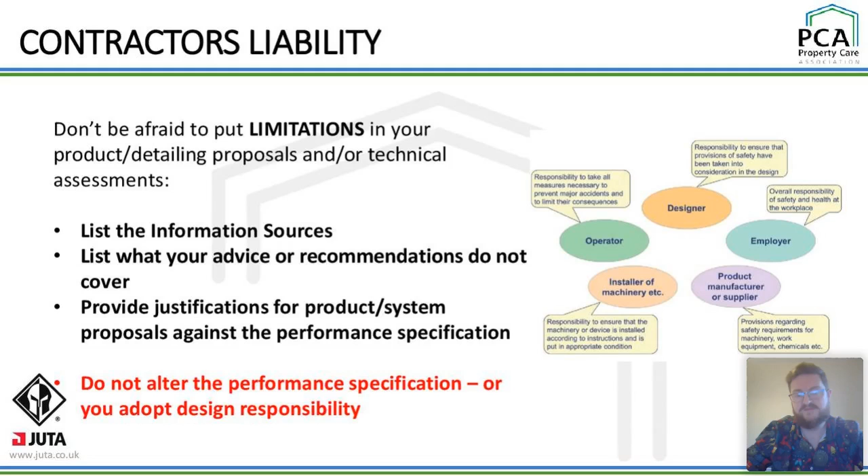So if the performance specification is based on, let's say, a concrete with a type 1 classification, I'll pick on concrete because they're big boys, and you alter that and say, well, you could reduce the structural element by incorporating this particular product. That is a huge shift in a performance specification, and so there's a lot of liability associated with doing that.

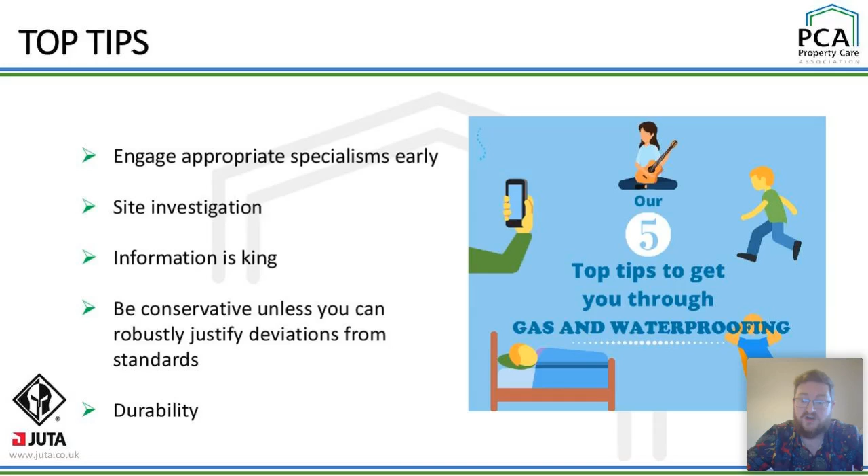Top tips, Andy loves his top tips from PCA, Andy and Paddy. Engage appropriate specialisms early, so get the relevant people involved as early as possible. Information, so site investigation, that information is king. Having that information enables us to reduce risk and risk exposure across the supply chain. Be conservative unless you can robustly justify the deviation from standards or performance specification. And durability. Let's look at how long these products are going to perform this application function.